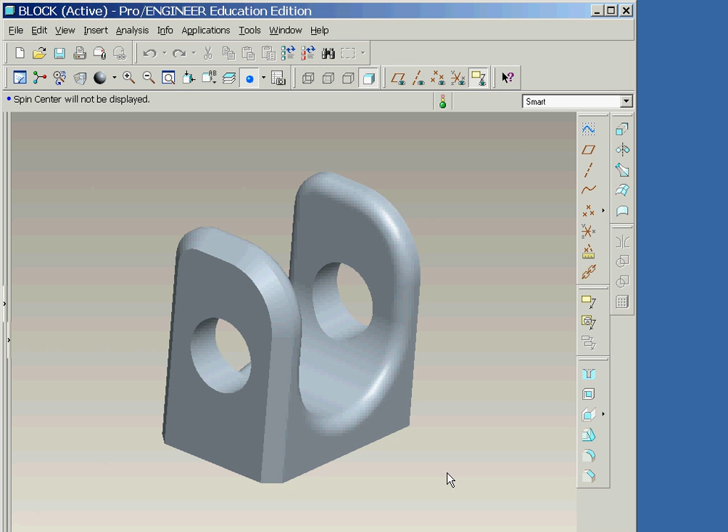In this session, we will explore how relationships can be established between various dimensions in a part. A relation is an algebraic formula that allows a dimension to be automatically calculated based on other dimensions within the part. We'll illustrate how to define relations by setting up two rather simple ones, which will ensure that the hole always remains centered along both the length and the height of the block.

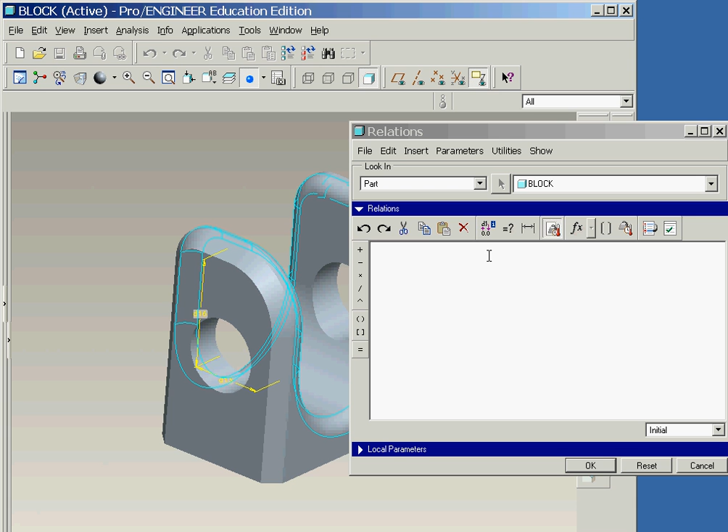We'll start by double-clicking on the hole, which displays its location dimensions. Now we'll select the pull-down menu, Tools, and then Relations. Notice that the dimensions have changed to their symbolic form and the Relations window has opened. The icon, which is currently under the cursor, can be used to switch dimensions back and forth between symbolic and numeric values.

Notice that the symbolic dimensions to the center of the hole are D15 and D16. In order to display the symbolic dimensions of the width and height of the block, we'll now click on the front face of the protrusion. Notice that the symbolic dimension that defines the height of the block is D3, and the width of the block is defined by the dimension D2.

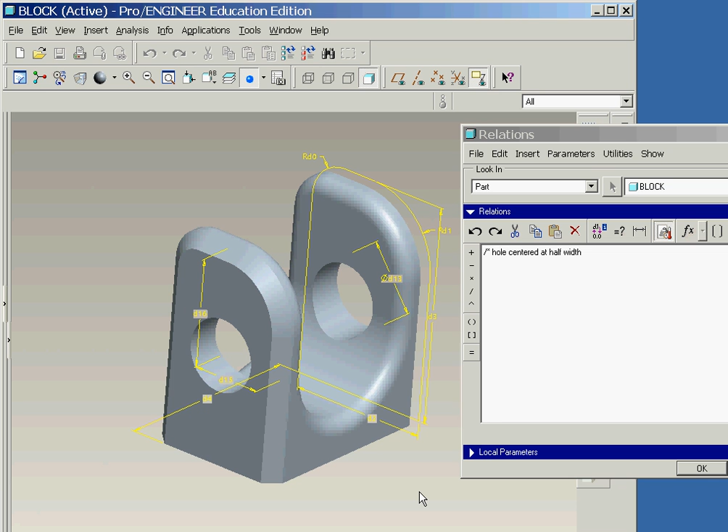Now that we know these symbolic dimensions, we can begin entering the relation equations. We'll start by typing in the comment line /*, followed by hole centered at half width, and then press the Enter key. The actual relation is entered on the second line with the equation D15 equals D2 divided by 2.

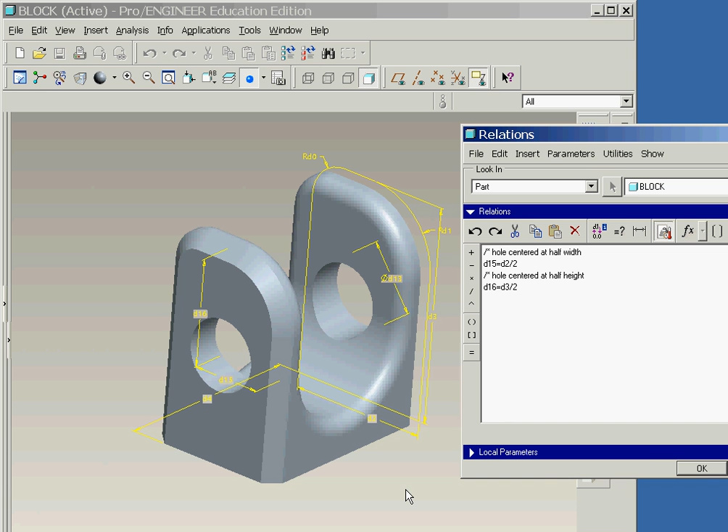Let's now add the second relation, which will ensure that the hole is halfway down from the top of the block. We'll first type in the comment shown here, followed by the relationship equation D16 equals D3 divided by 2. We'll now click on the Execute Verify button in the Relations window, and then click on the OK button. We'll now close the Relations window by clicking on its OK button.

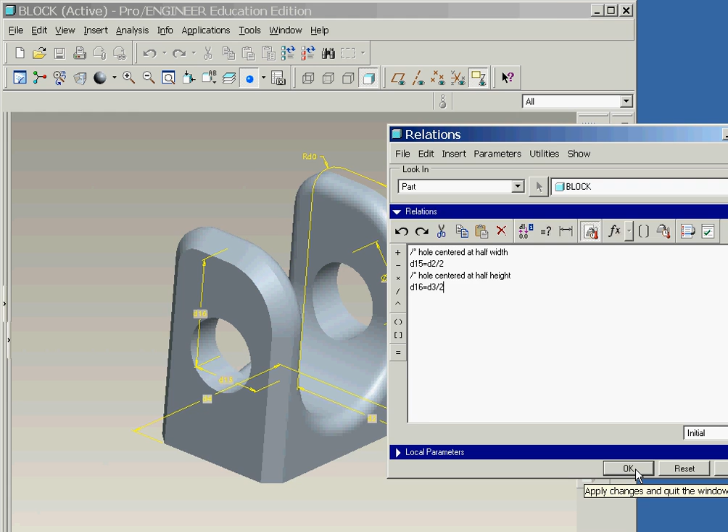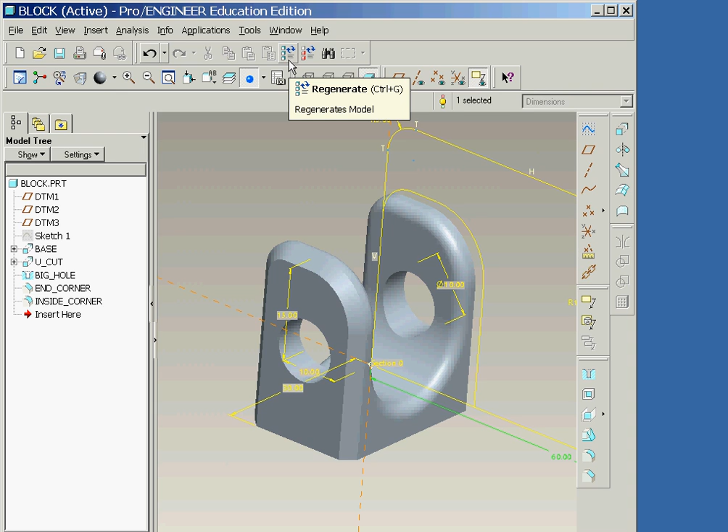Let's now test our new relationships by modifying the height and width of our part. We'll first select the base feature and change the height to 40. And then we'll change the width to 60. In order to cause the changes to be implemented, we'll now click on the Regenerate icon. Notice that the block has gotten both longer and taller, while the hole has remained centered because of the relation equations that we entered.